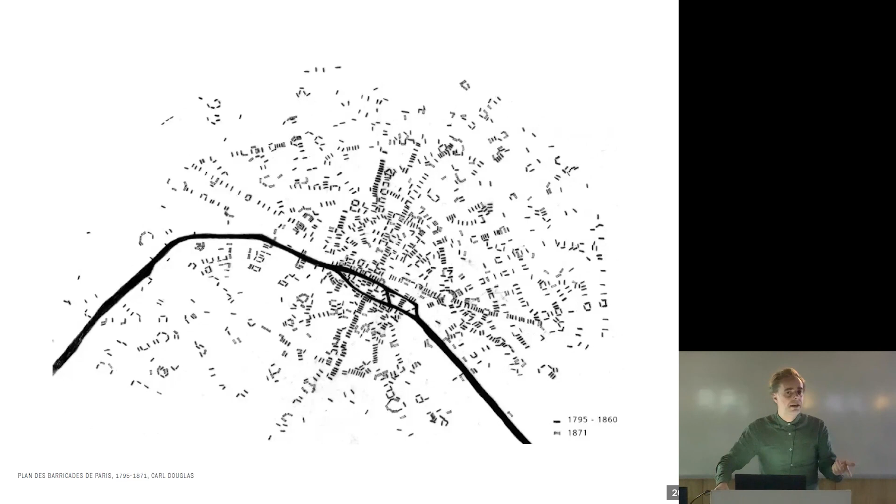This is a map of Paris, 19th century, and this figure of the barricade is actually quite important in Paris because mostly in the middle of the 19th century it was a period of intense manifestations and riots. This is the map that summarizes the places where all the barricades were situated. You can see the barricade as a very urban figure here.

There were so many barricades that Auguste Blanqui, another anarchist, derived some principles for construction, to build a good barricade, one that resists anything. So he published it in a book called Instruction for an Armed Uprising.

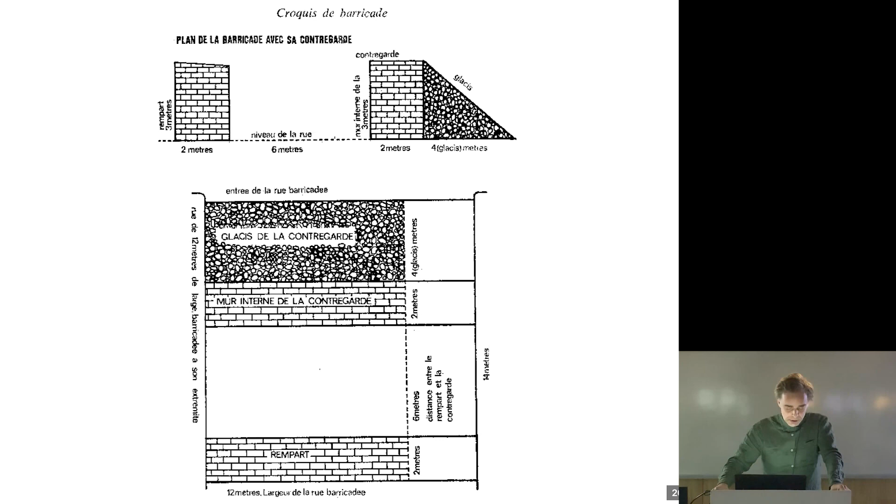But we thought maybe those figures have a number of characteristics that we may find in architecture. We may try to analyze this architecture in terms of what they allow and what they don't. So I've organized the conference around four characteristics that you may find in some architectures or not — characteristics that allow for freedom as we understand it: freedom as the capacity to raise the desire for occupation.

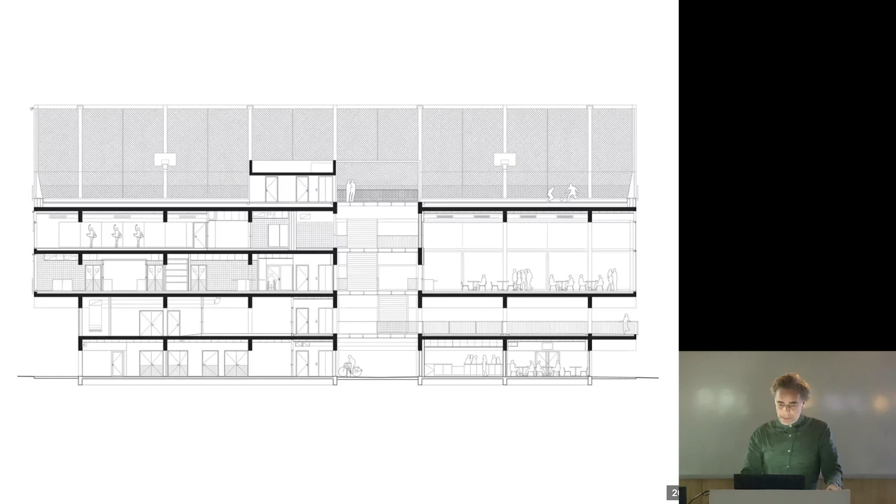So I'm starting with our Saclay building. It's on the outskirts of Paris, southwest. It's a university building. I won't tell you about the whole context, but I focused on the themes.

Within this building, there's one theme that we developed, which we translated as internal free space — spaces that are available but have no specific function. Basically, that's it. It's there, it's used for some particular reason, but it's not clearly defined what they're meant to be.

If you look at this building, you can see that on the first floor you have this mezzanine, you have a public path, you have a giant oversized stair, and you have the roof where you can play basketball. These are a whole series of spaces that are used all the time.

I mean, the roof was used before the building was finished. The young guys climbed on the building and managed to get to the roof because they saw that you could play basketball there. That's the first space that was occupied — probably because it was difficult to reach.

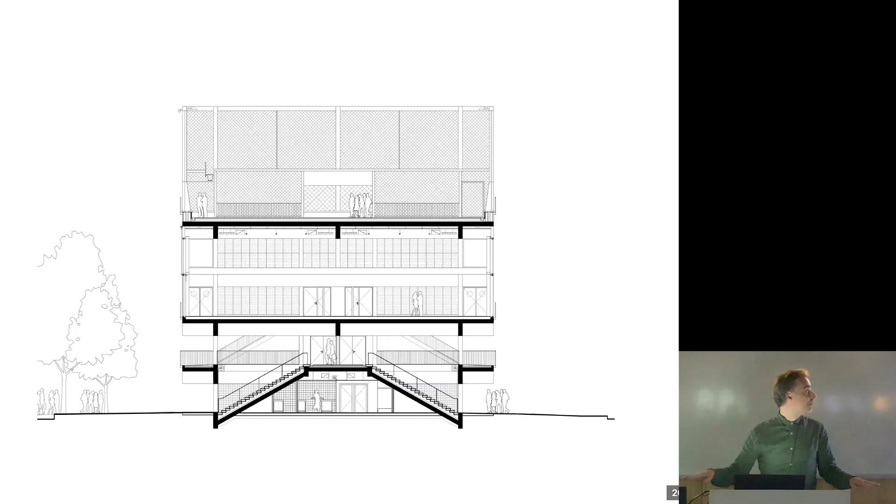And there's another figure, which is the stair. The stair is 5 meters wide. It's like a stair for a stadium. You can sit on it, and people can still walk through it — no problem, it's so big. And that stair comes from the ground and goes up to the roof.

With this particularity that it's inside the building, but it's an outdoor space. I mean, it's raining inside. It's full of moss now — it's almost all green. But it's like a Klein bottle — you don't know, it's like it's outside coming inside.

We did that because we thought it would be like a vertical street. You could cross the building from the ground to the top without actually entering internal spaces. So it means you can play basketball even though the building is closed. That was an idea that the building would run 24 hours a day.

So this is a place where you meet. You meet in the stairs as much as you discuss in the kitchen in a party. You're doing something because you're not supposed to do it, and that condition raises the desire to do something you're not supposed to.

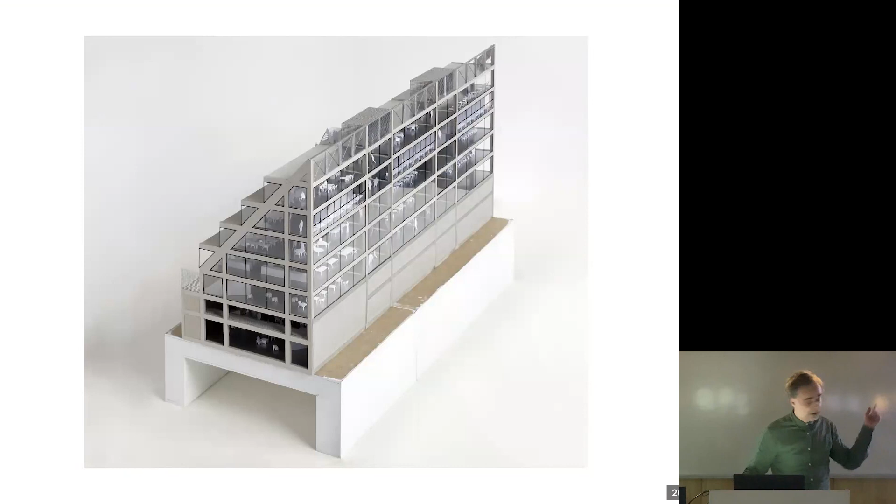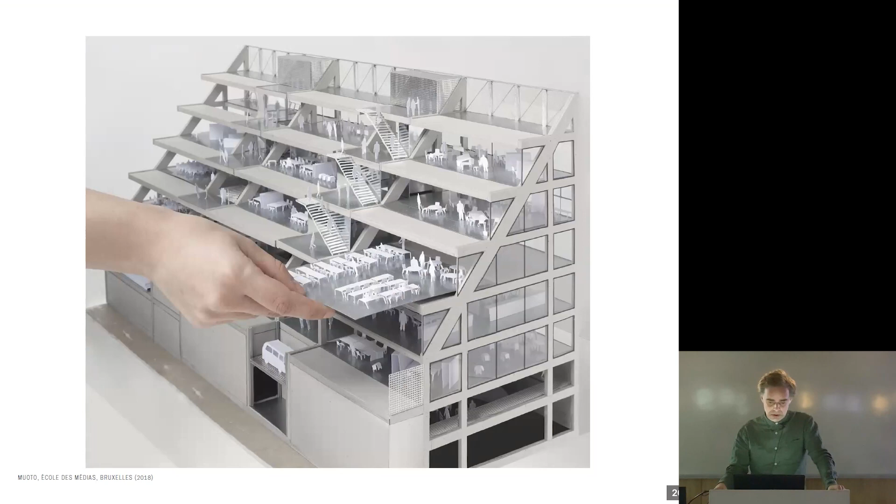So that's an example. This is a school for media we did for a competition in Brussels. And we had a special urban constraint that the building has to step back from. I didn't show you the context, but in front of this building there's a typical Brussels urban block with housing, and on the other side there's a park.

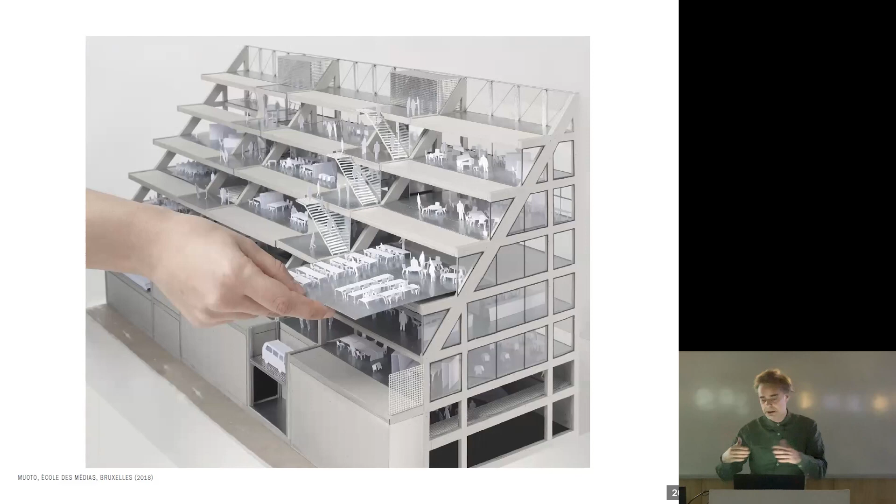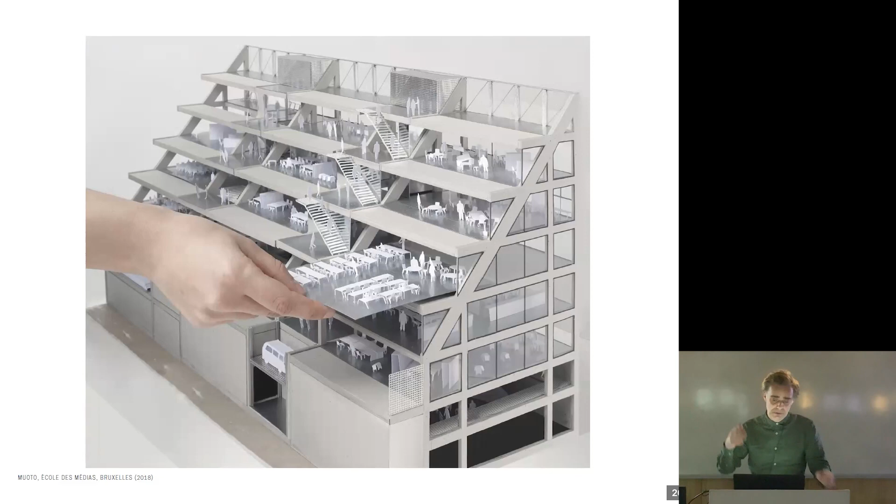So we had to step back, and we thought, why not use that constraint to shape the building and give it that very specific profile that's like a stair. It's almost like the structure of a stadium, because of course it's nice to have balconies, terraces on the south, for teachers and students to meet. Makes you want to climb the building also, and it did respond somehow to the program.

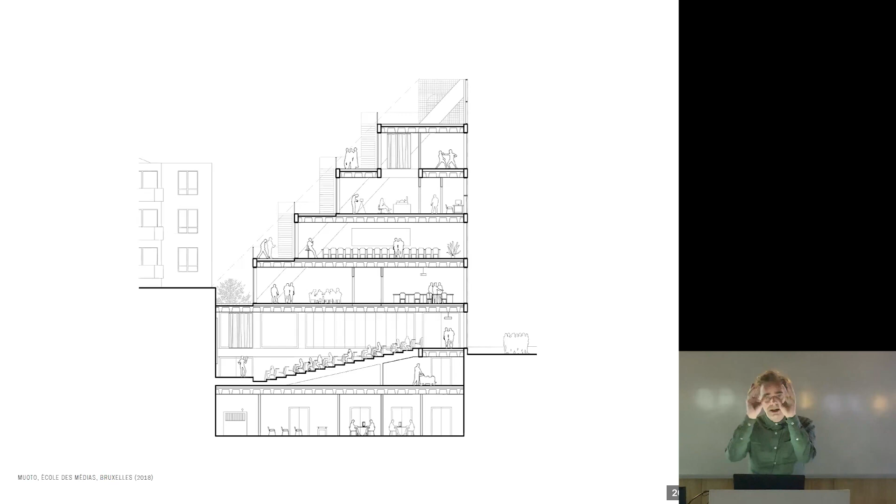Because in that school of media, you have large studios to record movies and TV shows that rehearse what students may be on TV one day. You have the auditorium as well. But also there are moments where the students, at the end of their studies, do their little movie, and you have very tiny cells at the top. They're tiny, and they spend like 2 or 3 months at the end just on their own making their movie.

So this shape, this profile, did allow us to have very large black spaces with no light - you don't want any light in a studio, not much, just a little bit for the auditorium. And you want to have a nice little cell if you spend months on your own at the top. So we thought the fact that every floor has a different quality of light, a different condition, allows you to do different things.

Because there are classrooms and offices, and all of those spaces require different depth. So if you would do a typical regular section with the same depth everywhere, you would just do the same - basically, that would be difficult. So we thought that this constraint, the fact that every floor is different, this is freedom.

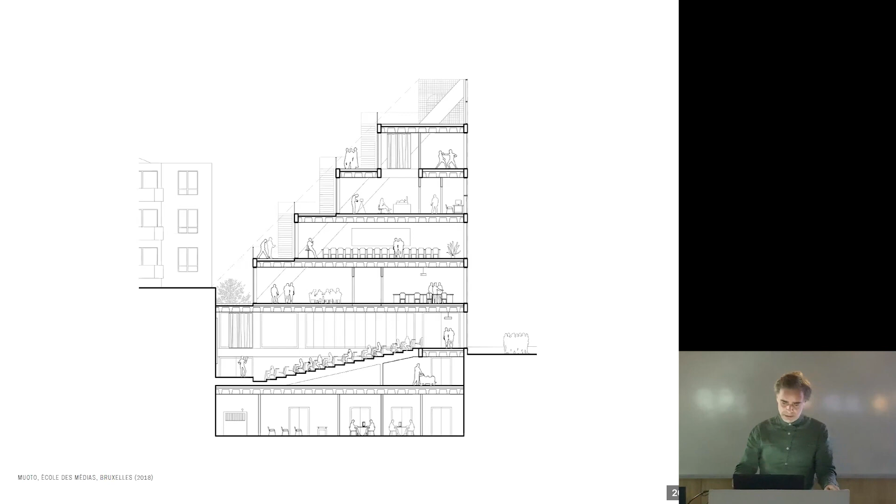This constraint allows you freedom. If you think that freedom is an open, flexible space with a long span, I would say that is not true. If you think of a typical office space, standard, perfectly flat, with all the appliances, plugs, perfect sound, you don't want to do anything there. So this is like an idea of freedom, but I think it's actually not.

So that's the building, different facade, and the basic structure of the building. If you want another example, a non-architectural one, of this relation between constraint and freedom...

This is a very known experiment from Matthew Barney called Drawing Restraint, where he attaches himself in order to draw on the walls and ceilings, which is a way of not drawing the way you would draw normally. It's pretty much architectural in a way, like he's jumping on a trampoline in order to draw on the ceiling. I think this is a good example.

The third figure is the figure of the scenario, thinking through scenarios. This is not very original, I would admit that, but it's still an exercise to imagine what a building could do, or how it could be occupied. You may not just think of one occupation, but several ones.

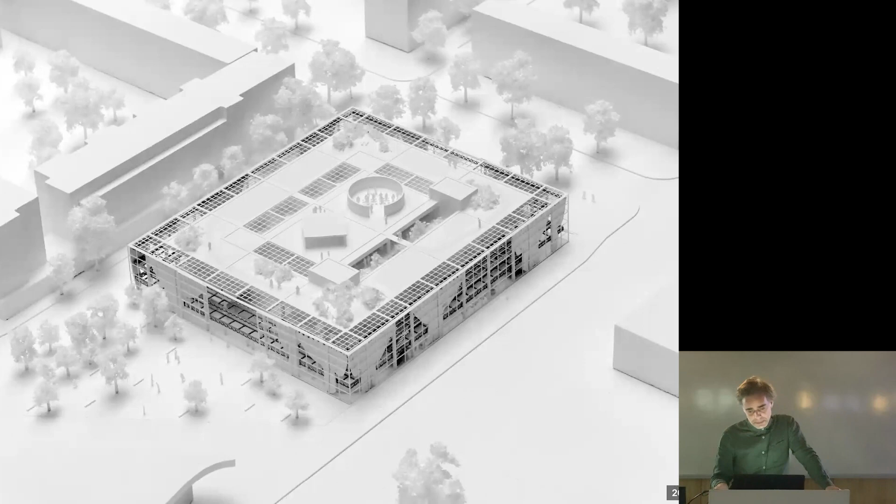So the example is a project competition we did for the Atelier Médicis, on the outskirts of Paris, a tough neighborhood. But the program is very interesting, really exciting. It's a place dedicated to street art, dance, occupation through the bodies. There will be dancers, singers, ateliers, and what we call the big black box, the main room where you rehearse and do spectacles.

So we designed it within a square as a way to define public space around it. The metro station is just in front of it, because the metro is coming soon. That's the reason the building is situated here.

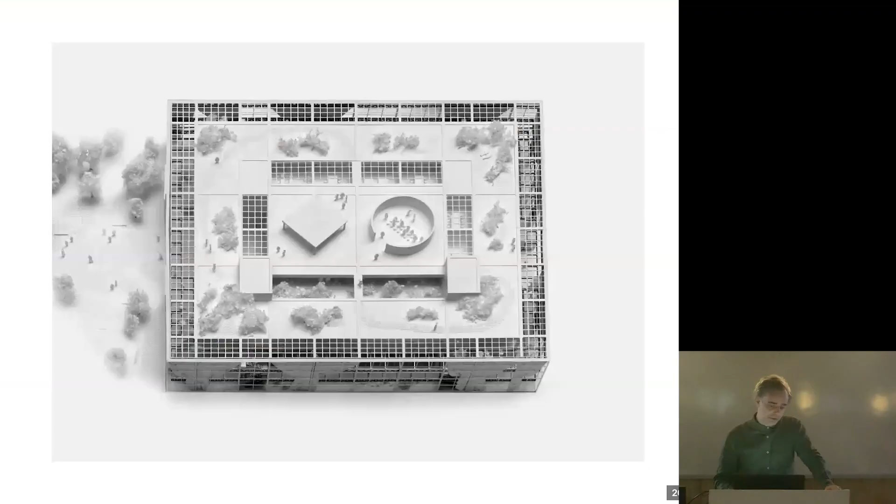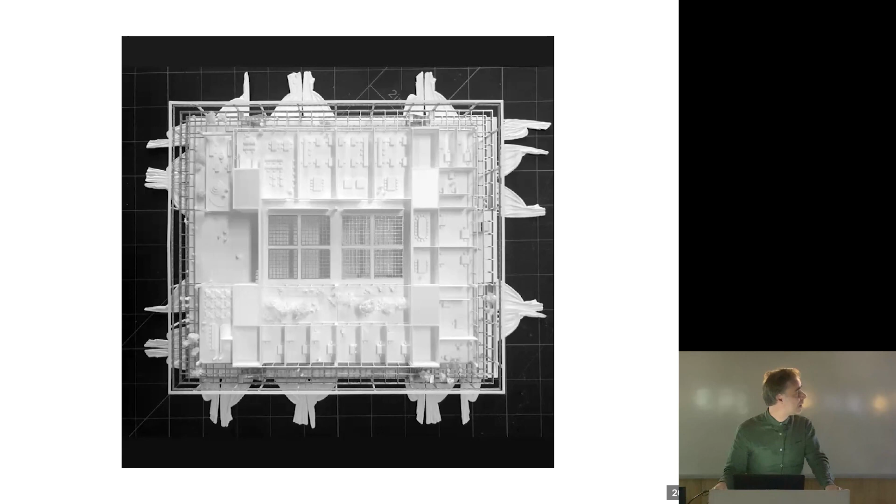It's a very flat building, and its specificity is that the black room is situated right in the middle, because it doesn't need natural light, and it's like an onion structure. Everything goes around it, and you have a first belt of studios, exhibition space, logistics, entrance, etc. There are many activities, and we thought that if we put the black room in the middle, you could also open it onto the different spaces around.

So we thought we wanted to keep it low tech, because flexible black boxes have a whole history in theaters, and very few of them actually work. Usually it's so complicated to change the configuration that it remains the same. It doesn't actually work. The one in Paris that works is in the House of Japan, but it's super sophisticated and mechanical, and we didn't have the budget for that.

So we thought we'd just put two sound walls, two mobile walls around. That helps with sound restriction, and you can just open them. You can open them on the left, towards the entrance, on the right, towards the logistics with the truck, or on both sides.

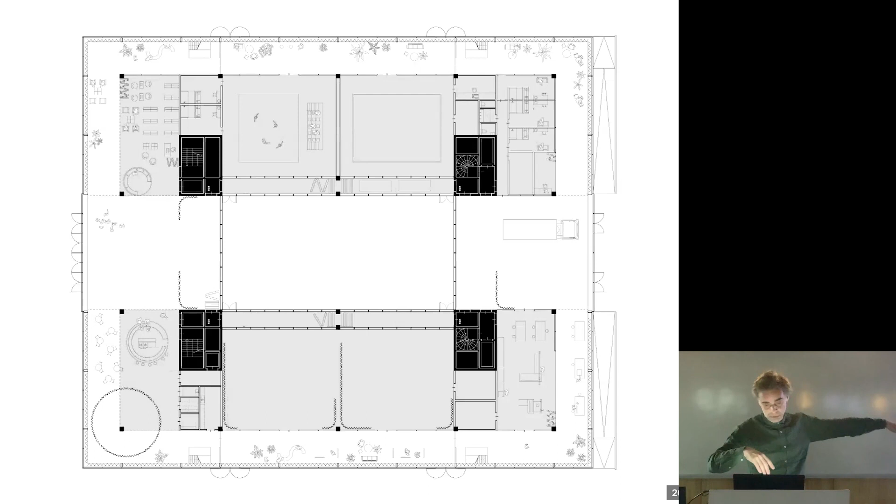On the bottom of the plan, you have the white cube, still close to the black box. That's the exhibition space, and at the top you have studios. Then all around you have the circulation.

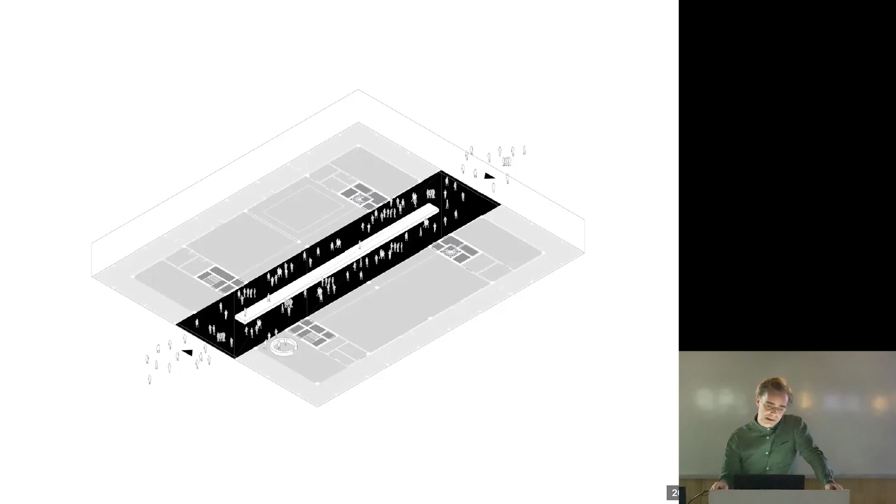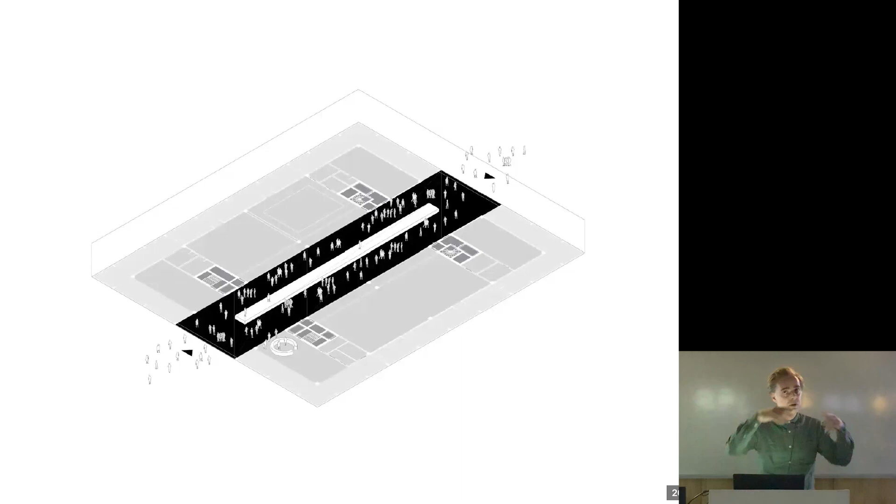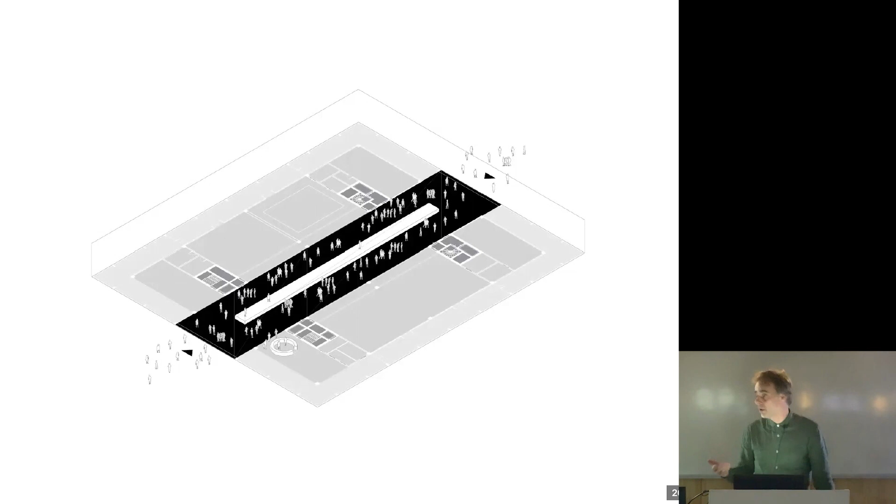We talked a little with dancers, in particular Boris Charmatz, who told us: look, nowadays what we're looking for are special places that are inspiring for new choreography. What we're looking for is not the typical wooden floor and all that. We want places that help us imagine a new way of dancing, and we can dance on concrete because we have sneakers. It's good. You don't need the kind of wood where you can only do normal dancing. So I think this idea meant to us that you could dance anywhere.

You can dance in the stairs, you can dance in the corridors, you can dance in the logistics with the trucks and everything. So here you can have a parade. Here you can have a little forum, discussions or boxing. They look like the guys are boxing in the middle. This is just a hall. The entrance hall is becoming the place, so it could have an auditorium that is open to the outside.

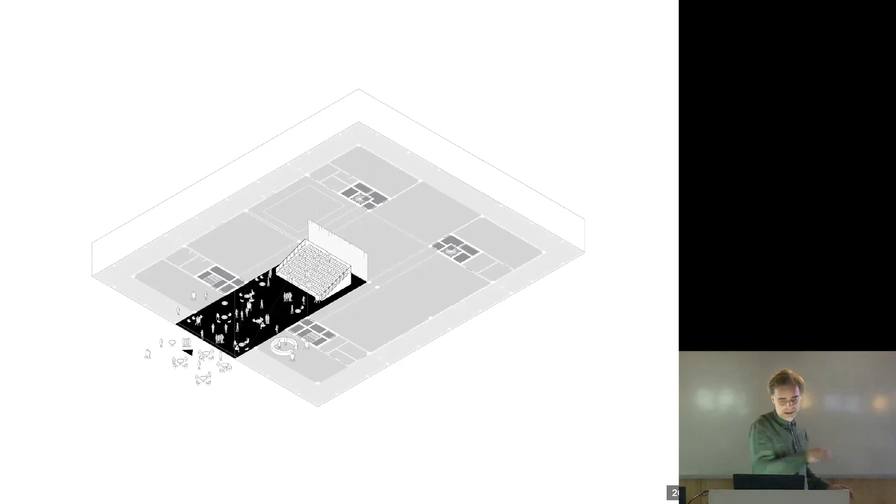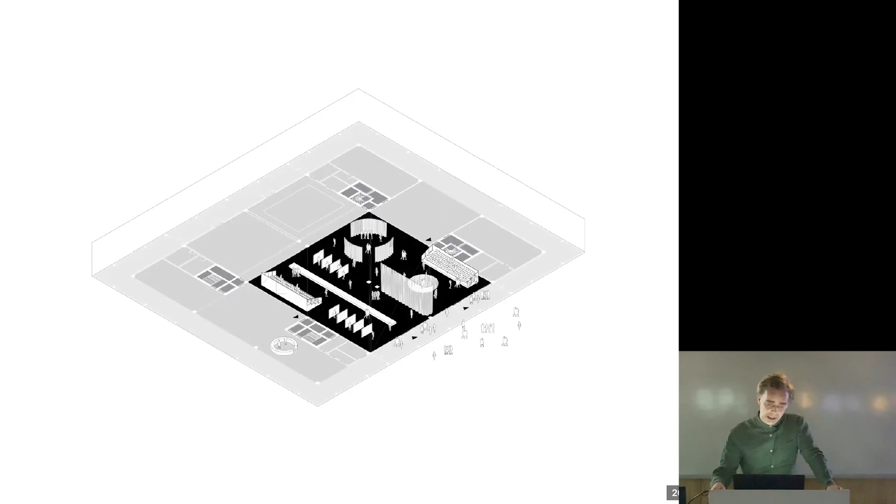Of course, you can separate the two parts of the room, but that was part of the program. And you can have this huge exhibition space that you don't have much around Paris, and it has this square proportion, and you could do quite different exhibitions. That's another - I don't know how many we had. We didn't put them all, but it's almost infinite, depending on what you can do.

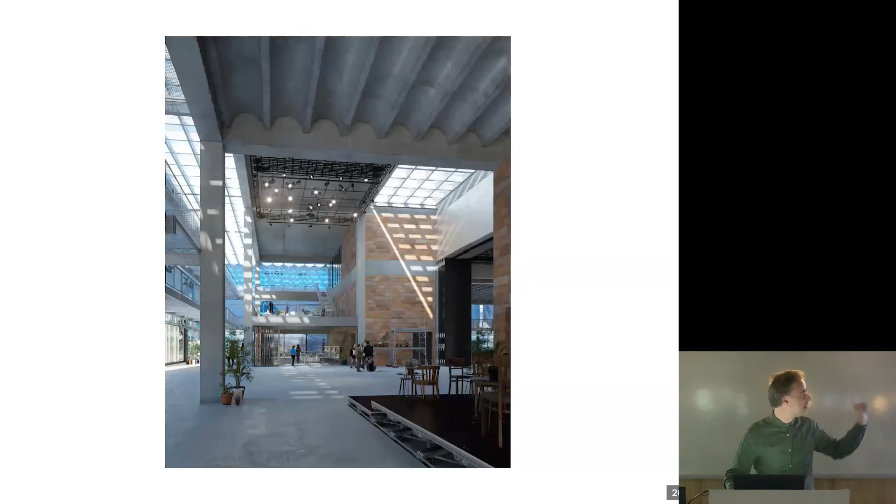So I don't remember how I finished this example. Oh yeah, the last part is the corridor. That's the space that goes around. Actually, all circulation is situated on the periphery of the buildings, where the different rooms can open to - where this is the exhibition space. And this space, it means that the facade became so thick, so wide, that you could inhabit somehow the facade itself, and you have basically no corridor, no black space within the buildings.

There's partly light coming from the ceiling, but this space around became also an unprogrammed space. It wasn't part of the... it's 5 meters wide. It's actually the size of our office, with exactly the kind of space we work in. Maybe that's why we liked it.

And this is a space - this is an unprogrammed space, so it sort of relates to the kind of space we imagined for the Saclay buildings, also in terms of climate conditions. It really helps the building get warmer during the winter, and it's ventilated, so it helps the building cool down during the summer.

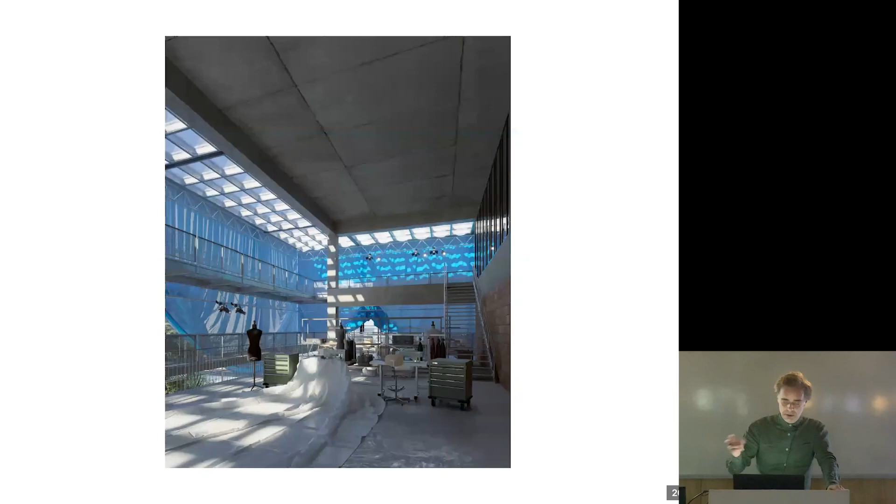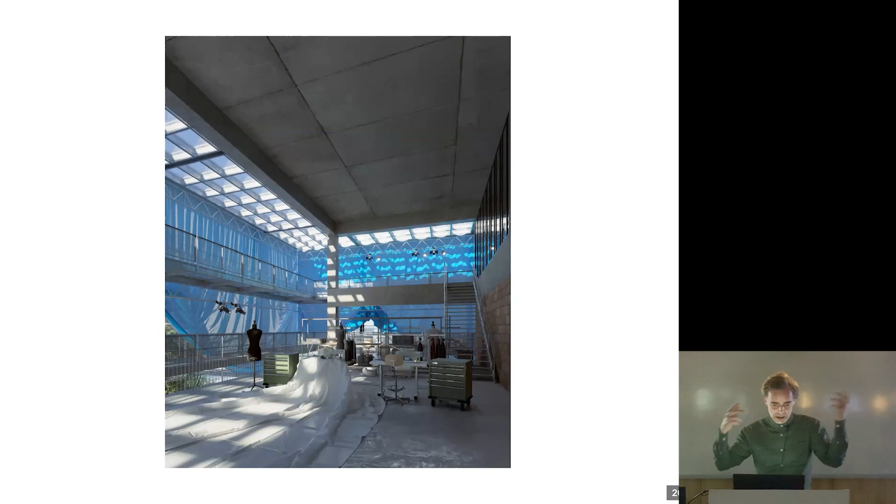That's the sewing studio that is situated on a mezzanine, and we imagined that you would have the backstage. This corridor would be like the backstage. So we installed a few lights, and we thought that dancers would have interesting spaces in order to perform or to improvise something.

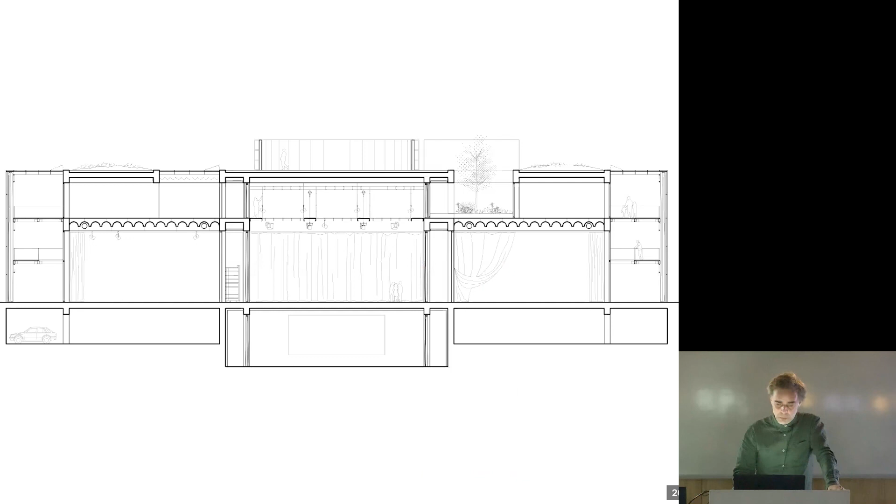And the last year we added those curtains because they gave a sense of a very theater feeling. That also helps for cooling, for thermal aspects and constraints of the building. It also helps hiding that space and keep a certain intimacy for everybody. You're in quite a difficult district, so you can close down the building as well. Very simple section - we introduced a few courtyards, and of course the roof is accessible as another place where you can perform as well.

So the tests - so this is where the title of this conference is coming from. This is a book by Maggie Nelson. And this will take us to a last figure that we'll develop a little more, which is the grid.

The grid for us is really a feature or figure of freedom. It says that freedom somehow is not a question of letting go, of just expressing yourself, but it's also a question of measure, of the size of things, and how you govern, how you organize a space. Because a building always implies a certain kind of hierarchy. You always have to decide: do you put people on top of each other or next to each other, for instance? There's different organization - who's on the top, who's downstairs, who's on the left, who's on the right, which condition do you give to everybody?

So buildings always imply a kind of organization. So which organization do you choose? That's, in a way, a very political aspect of architecture. It means architecture forces you to decide how people will organize themselves. It's a way to say that any building is like a small society - we live together. So how do we live together? That's a big question.

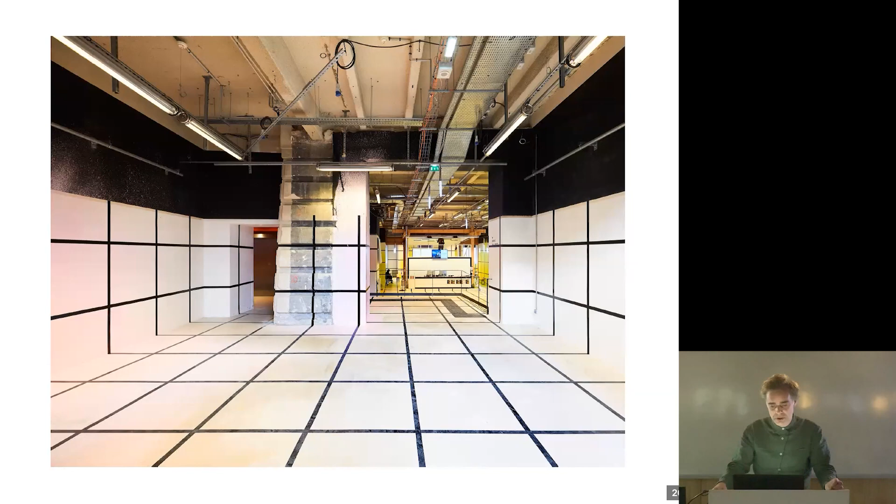We did a little installation with Arnaud Brandelouber last year, just after the lockdown, at the Cité de l'Architecture — this is our national place for architecture. It had been closed down for almost two years, and when they were reopening, they suggested we do something together. So we played with the Republican aspects of the building, because this is our national place.

Our first idea was to go downstairs into the cave, into the archives. We thought there was so much material and stuff for exhibition, and thought, let's exhibit the exhibition infrastructure — we won't show our projects, there are books for that. We had our 2Gs, we made a special issue mixing our two magazines together. And we said no, let's exhibit the exhibition stuff itself.

This was going to be like a spring cleaning, as we were reopening — we'd take off the dust and exhibit the hidden infrastructure of the building. So we thought, okay, let's organize everything. We'd make a grid, one by one, put a small number, and clear things out. The technical team was pretty happy — they said, oh yeah, we've got too much stuff, we'll do that. So we started taking tape, like stupid black tape.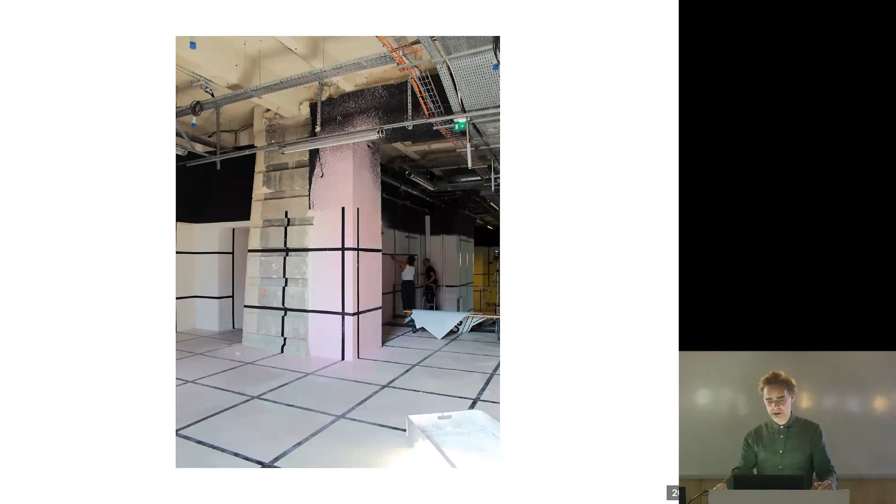We started drawing this grid from the floor, and we had kilometers of tape, like 4 kilometers. Then we went to the walls, and then we had exceptions — a strange column here, pipes, we went behind the pipes, but the structure is also on top of the structure. We started dealing with plenty of exceptions, even the windows.

We thought, should we do the windows? And said, yeah, let's do the windows, why not? And the stairs — the stairs already had a white strip for handicapped people to make it more visible, so there was already some tape there. Radiators, yes, let's do it. The lift — no, won't take the lift. Angles, yeah, great, why not? And toilets, I don't know.

Anyway, every day half of the office was there taping everything. It took us like a week. They were calling me, what do you do? Do we tape the toilets? I said no. We started taping it — all right, go for it. And then I think we were sort of dealing with our own Republican system, this overall grid that is meant to cover everything, like the country, the nation is one.

We had to face that there were many different places and things, and we had to make a decision whether they would be included into the grid or not. So I think we were just asking ourselves the great questions about how could we arrange our ideal Republican, equal Republican system with the cultural differences.

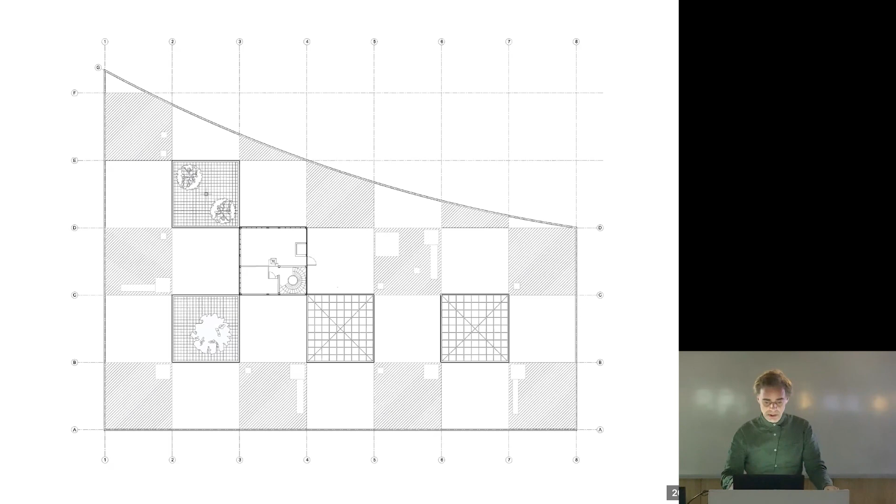The last building we did is in Montpellier, south of France. And here the grid is not 1 meter by 1 meter, it's 12 meters by 12 meters. So suddenly the size of it allows to do very different things. So the initial program of this building is an office building, basically.

The interesting thing is it was dedicated to high-tech companies, young companies that grow a lot, that reduce, that have a very uneven future, and they have to change. We reached this idea of flexibility, but we thought if we do a normal office building, they won't come. It's situated next to the high-speed train station, far away from the city center. So they wouldn't come. They are creative people. So what kind of space can we do so there would be good reasons to go that far?

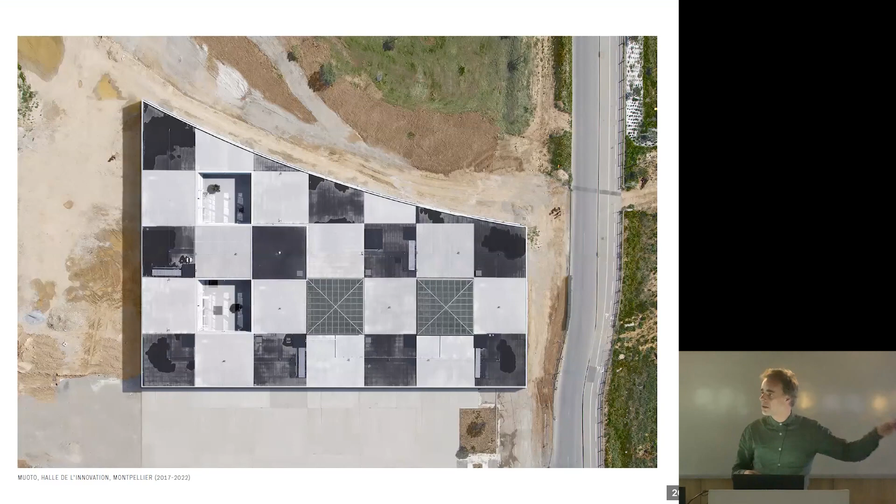So we thought, rather than doing a big open space, we'll do small open spaces. We thought we have to divide things so it remains somehow flexible, but at the same time give you very different conditions to work. Good reasons to see someone because its office is in the corner, or on top, or downstairs, and so on. So the grid here seems to be a very equal figure, a figure that makes everything quite similar, but in fact it makes every space slightly different. That is, repetition is not equal to sameness.

Repetition can introduce variation as well. Difference and repetition—I won't make too much of it because I'm not a philosopher, but you get the idea by repeating. If you think of, for instance, Philip Glass's music, you can see how much repetition can create variations and differences. So that's about the same idea here. By repeating this grid, you can reach different conditions, and we pretty much work on that possibility.

For instance, this is our internal street. You see that we often use that metaphor of the street, of the public space within buildings. Some squares are occupied by little open space, like classical, normal office space. Some are atriums, and some are patios. And that's basically the scheme that we started from.

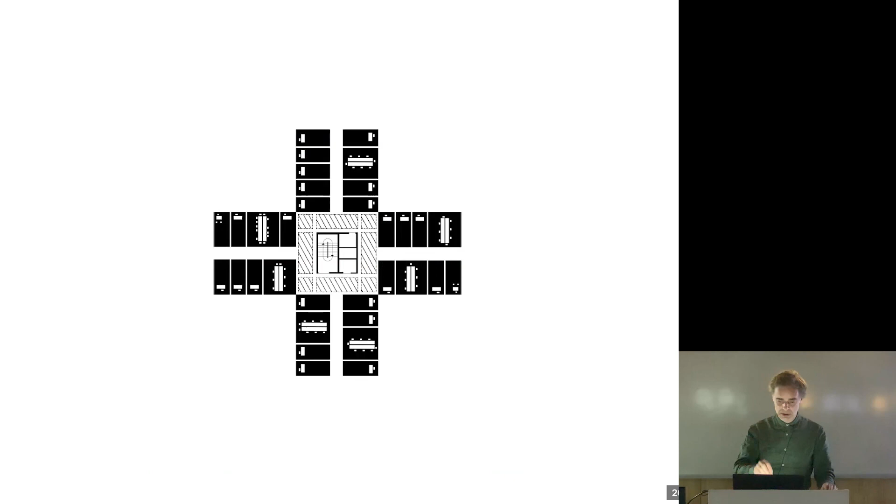That scheme, we thought, okay, you have a core with services and stuff. You have the possibility to reach 4 different office spaces, and then you multiply. It's an infinite grid, and we introduce one street in order to go through the building.

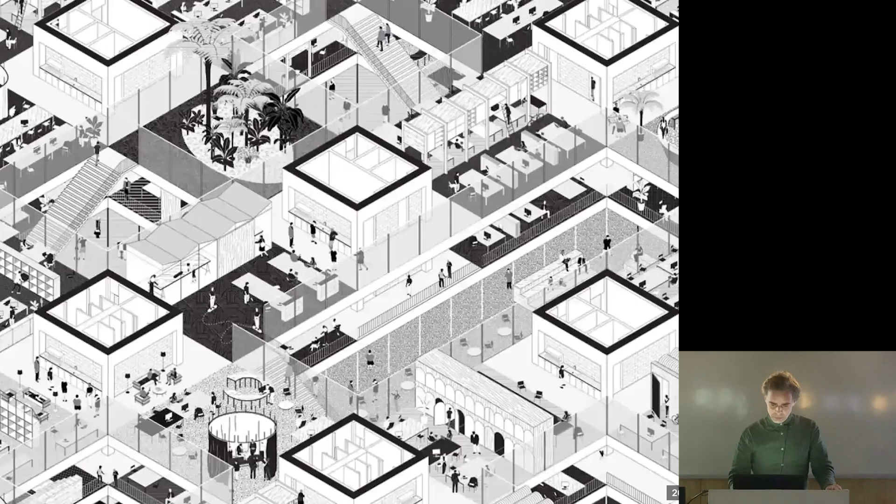We talked to the mayor at the time. He said, 'But that's the Roman city, basically. Montpellier is a Roman city.' He said, 'Yeah, it's actually the Cardo, the two axes, the Cardo and the Decumanus—the east-west and north-south axes.' That actually defined the very beginning of the city.

So since this building, like the Saclay building, was the first to come on the site, basically we had a very undefined context. We were sort of marking the beginning of the context. That's why this building maybe relates pretty much to the Saclay building. Well, the grid sort of helps you define the various conditions—like the beginning of France, when the nation starts, how do you start with a nation—and the grid came as a starting point, as a way to organize yourself before you know exactly the content of every bit.

So that's the model, and you can see this alternative for the office building. Office buildings usually have generic office space, 18, 19 meters wide, with a central core—like a third of the building is actually in the dark. And here the idea was that most spaces were lit with natural light.

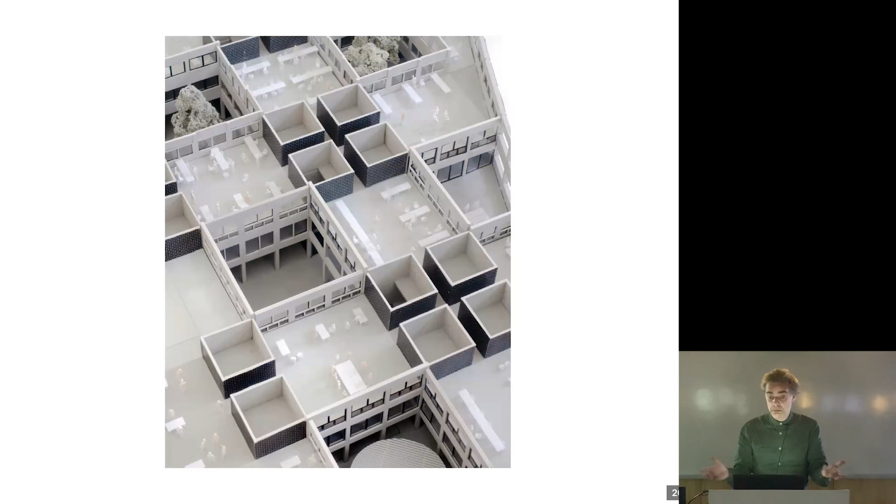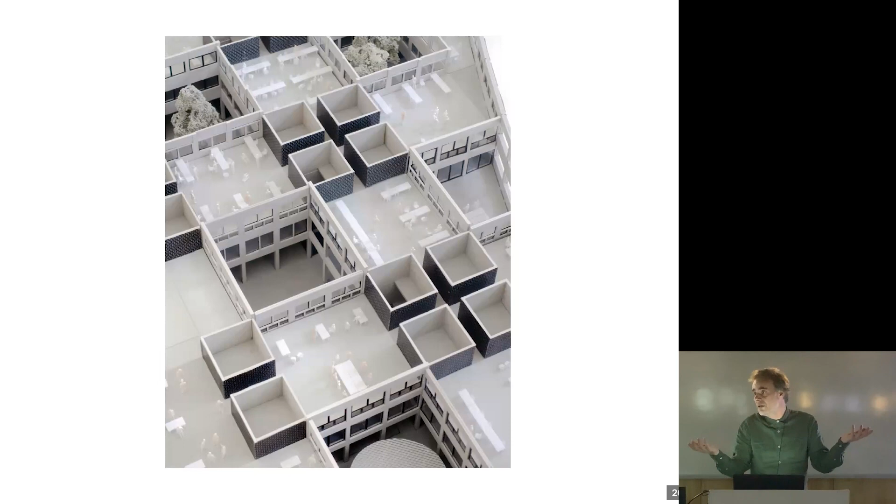And if you think it's 12 meters deep, then you could do housing—it doesn't have to be offices. So it's a different way of working, giving real occasions to go to a terrace or a patio. I mean, to have real differences within the building.

That's an office space, for instance, on the first floor. We can talk about architecture a little bit. The big question was how to make it while being effective with the cost of the building.

This is cheaper, almost the lowest normal cost for an office building. We had to imagine something in between public infrastructure, public equipment, and the office building, given that they don't cost the same. So the idea was to create that crossover, that typology that is in between.

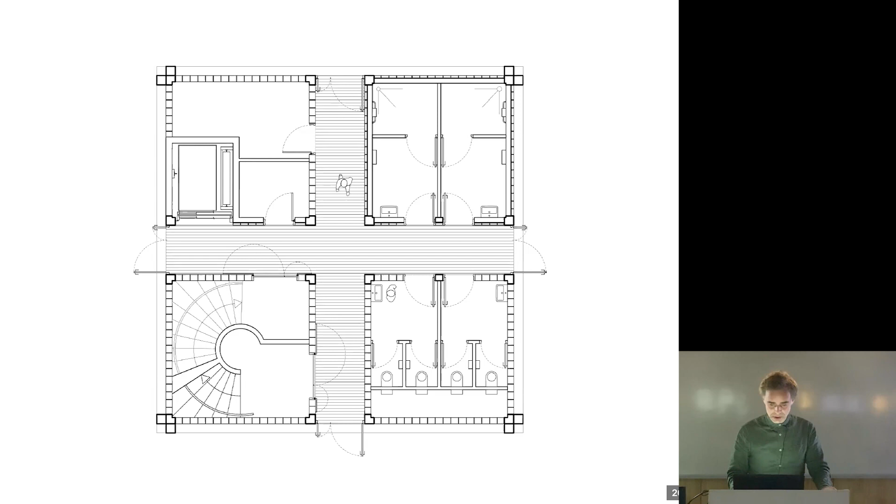That's an example of the same square. Why 12 meters, actually a little less than 12 meters, is because there you can fit exactly the technical core with the circulation, the toilets and everything, but you can still fit an office space. It has natural light from everywhere.

This is a meeting room with projection, 360 degree projection. This is the atrium. And this is the patio that is outside.

You introduce various terraces, outdoor terraces on the two ends of the street. And this is one atrium with the meeting room in the middle. So the idea is that from anywhere within the building you can see through.

Actually, the building is absolutely transparent. It's not so much anymore because they put partitions a bit everywhere. But the rule was that everywhere you have that transparency, you make a main room. You have an open space, and you try to fit all the small offices where you don't have these transparencies, so you keep that view through the building, even though it's very deep.

That's the public ground floor where we've put all the public activities, like the cafeteria. There's a little forum, the park for the bikes, and the entrance. Here we work with these concrete blocks that help for the sound insulation and sound absorption.

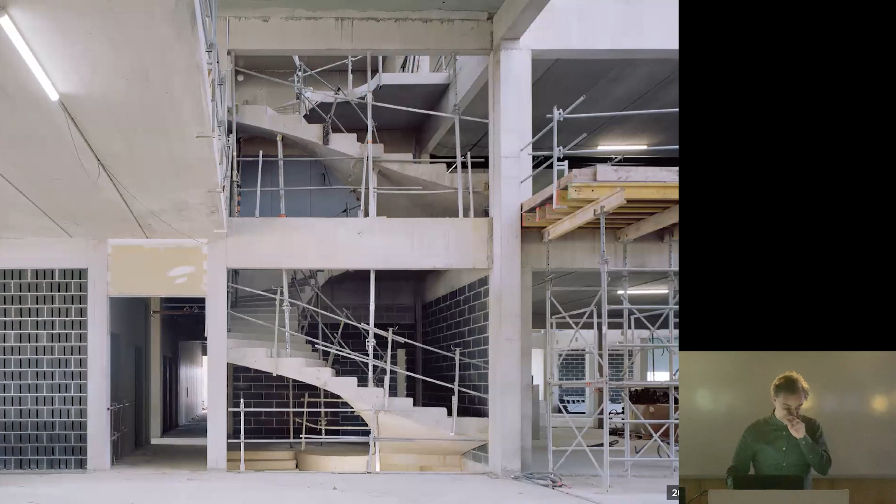That helped pretty much. These are the stairs, and the conceptual model that sort of came at the beginning but became more true in the end.

You have entrances all around the building. That means that every part of the building can work independently from the others. So it's the idea, just as it is in the Saclay building. The idea is that instead of having one main entrance, you have a series of entrances.

Because collective freedom should not oppose individual freedom. So how do you deal with that? How do you do it if you let individual expression exist? How do you do that?

Well, in the Saclay building, you don't have an entrance hall. There's no entrance hall, actually. Once you get rid of the entrance hall in your program, everything becomes different. You can organize yourself in very different ways. That means if you take the stair in Saclay, you can go to one activity or another.

They're all locked, you can lock them up. But you're not restricted to the activity of the other. So that's kind of a political aspect also of architecture.

But it's pretty much the same here, just on a very horizontal level. You have entrances everywhere, and in theory you would never go through the entrance hall. Okay, that's not exactly how it works now, but it's still possible to do it.

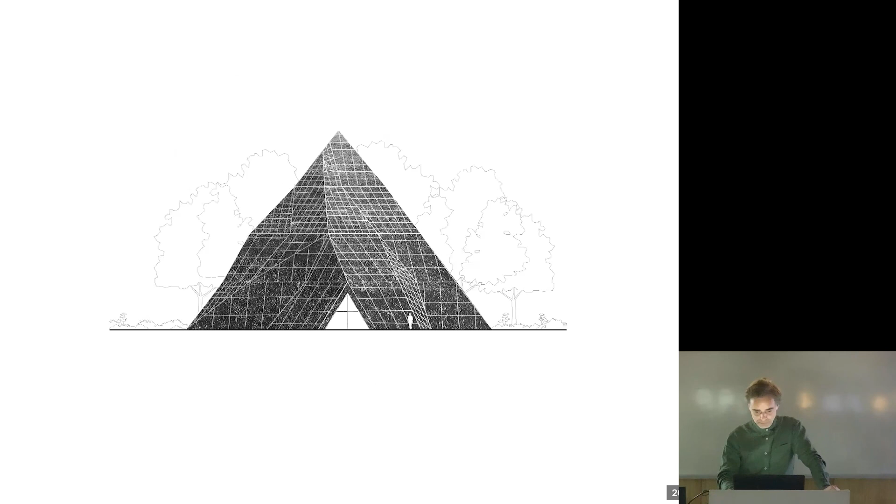The latest project will be the Biennale project with this funny sentence from Emma Goldman who relates dance and revolution. She says, if you cannot party in your revolution, I don't want it. It's just that the revolution shouldn't be about killing each other. It should be about celebration, basically.

So we did this pavilion in Venice. I'm not sure - this part of my presentation I haven't prepared, so I'm not sure where to start from. The one important theme was about occupation. It's okay, it's part of the theme.

Here we started from the idea of the feast or the party. In French we say fête - it has a really open meaning. A party is a bit restrictive to this kind of event, but we were more thinking about the preparation of an event, whatever event, how you prepare yourself in order to accept a whole bunch of people and prepare the capacity of a place to be occupied.

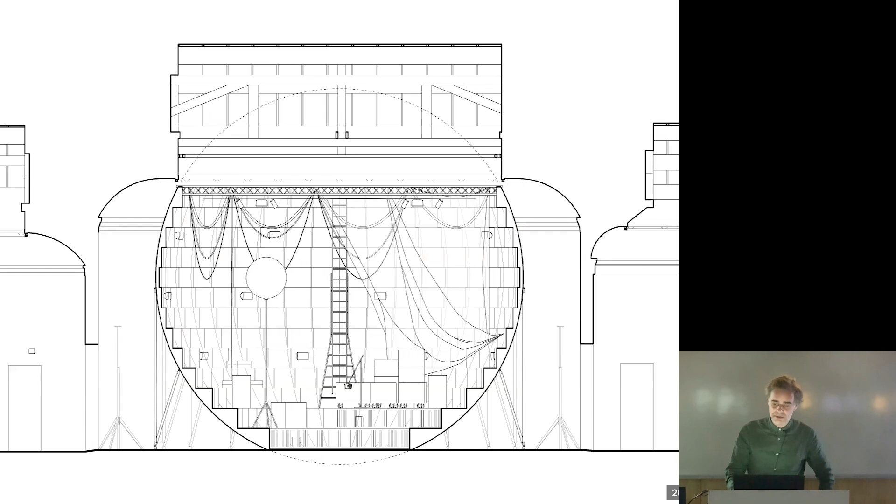So this idea was that of this installation that it would call for not exactly a future, but some elsewhere. How can you connect? How can you imagine something, a society that is very different? So that's the section. It will place with the French pavilion, a neoclassical pavilion, not really easy to occupy, and we imagine this boule-like shape, referring mostly to the whole imaginary of the spheres in architecture.

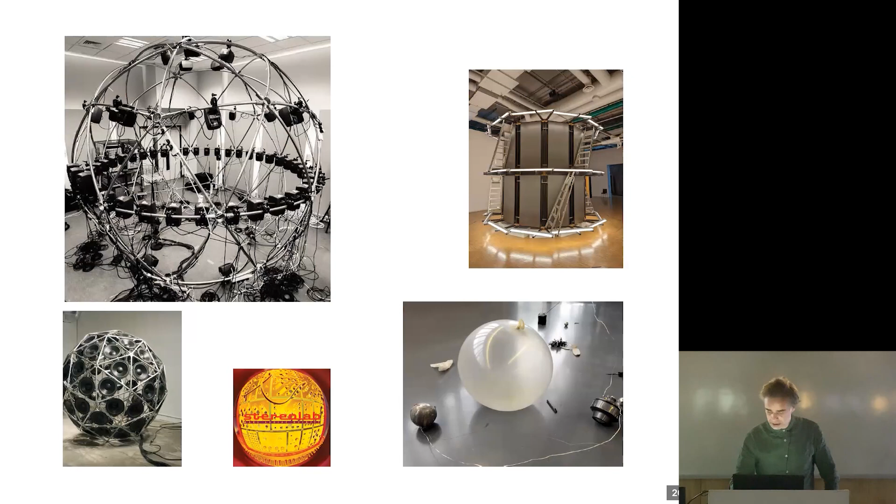Our first job, went too fast. I don't know, that's just our method. We really work with the scenographic methodology, doing the storyboards of everything that was round, more or less.

And we thought that the object itself should come as the discourse itself, meaning we wrote very little about it. We wrote for ourselves, but we didn't publish it. We said this pavilion does not sustain any discourse somehow. It's not a photocopy of a prevailing discourse. The object is a discourse. You can interpret it, and therefore you can occupy it the way you want.

So one week every month, there's a ball. There's a different event that is enacted by either dancers or researchers, by students, professors. And every month it's a different thing, a different event. And basically the program of the building, or the identity, the purpose of the building, actually builds itself month after month. So it's actually the repetition that creates the uniqueness of the building.

Deleuze on difference and repetition, he says, look, think of a festival: the more it repeats itself with a different programming, different artist, the more it becomes itself. Its identity is ahead. It's not the beginning, it's not the origin. It's the origin that builds itself with time.

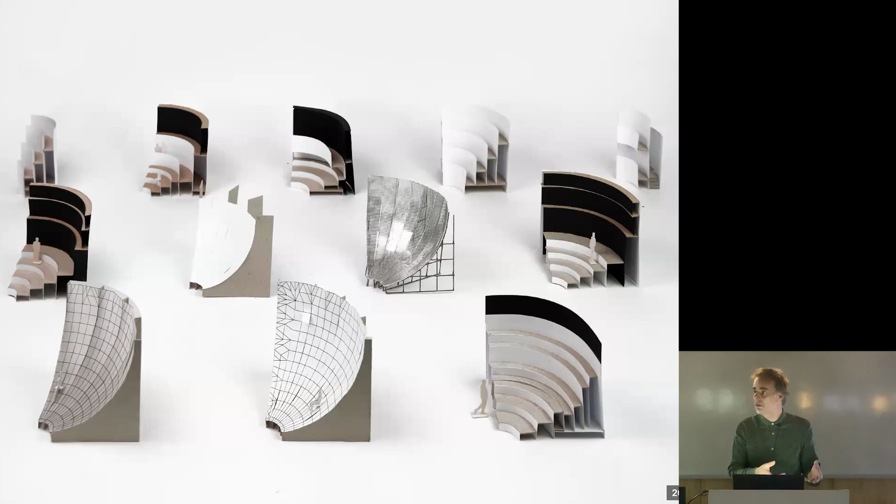And if we would be Peter Sloterdijk, we would say, no, it's about to take off. It's like it's a spaceship. No, it's going away, and we need to take distance, looking at our planet to understand it and respect it. So these are, for instance, two very different views on ecologies.

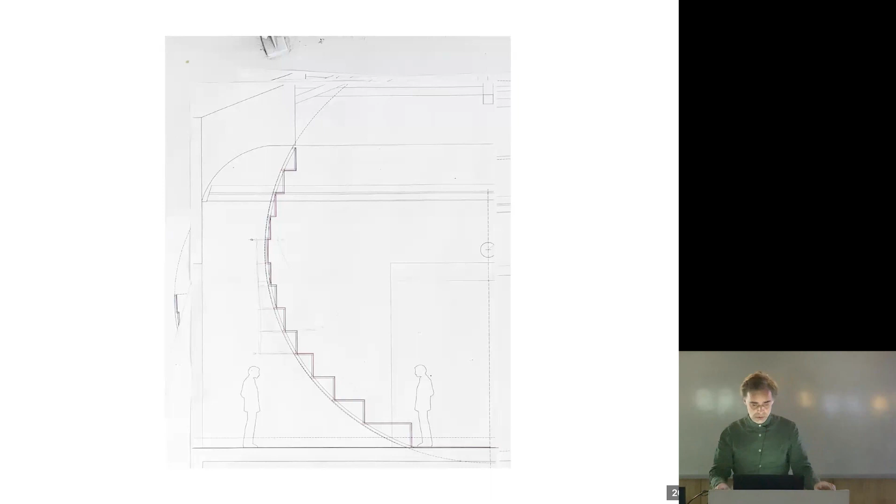We thought this was an object that should raise actually questions rather than give answers, because as we know in architecture, we are given many answers. At the moment, we exactly know everything we have to do, so it's a very good way not to think at all. So we thought this object should help think rather than tell us what to do. And I think most pavilions in the Biennale are exactly telling us what to do and what to think.

And these are a series of objects that actually inhabit the theater. We thought it would be inhabited by funny objects, and like in a picnic, we thought, if it's landed, you open the door of the caravan, of the trailer, and you spread all the devices, the tables, and everything. So we started designing a whole series of objects.

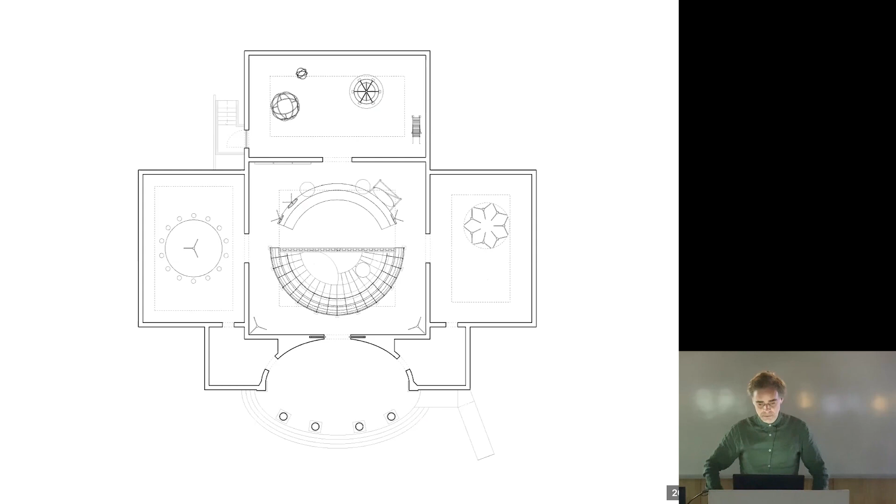So that's the plan. You see that the theater is really at the center of the building, and it's filled with little objects that we put in the different peripheral rooms. So that's how we enter. You can see the semi-sphere at the entrance.

You get wires because there's sound everywhere. It's a sound that is semi-musical, semi-spoken. That's the thing. We had a fairly big artistic theme, so we asked the composers to say, look, we need to feel that we hear voices coming from far away, playing with the idea of science fiction. That's the sphere being constructed.

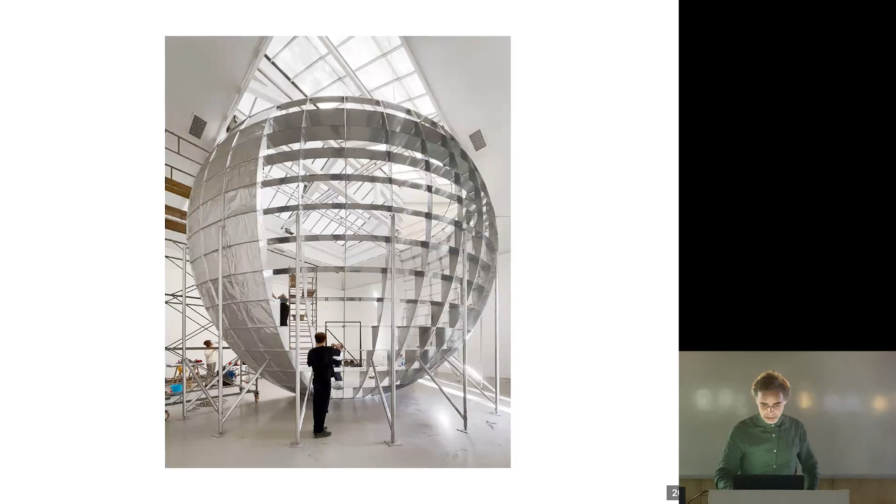And the idea is that the whole theater is actually built out of steel, because we thought this is its first life, but we'll be able to bring it somewhere else. You can totally mount it and unmount it, so it will be displaced, it will travel, it will go somewhere else.

So we were, of course, criticized for using steel, but we thought... because steel is bad, and we said, but for how long? I mean, it costs a lot of energy, and we thought, for how long? Because if...

I'm sorry, I didn't write it, so I'm making a small digression. These are things I was telling some journalists, saying this is not ecological, because there's a lot of energy in all this steel, but that's for how long?

Say, look, if you take a car, how do you measure the energy that the car dispenses? How much does it cost? So you say it's 6 liters for 100 kilometers. It's how much you need. And in architecture, it's 6 liters, which is very absurd, no? Because you can measure the amount of energy but you don't know for how long.

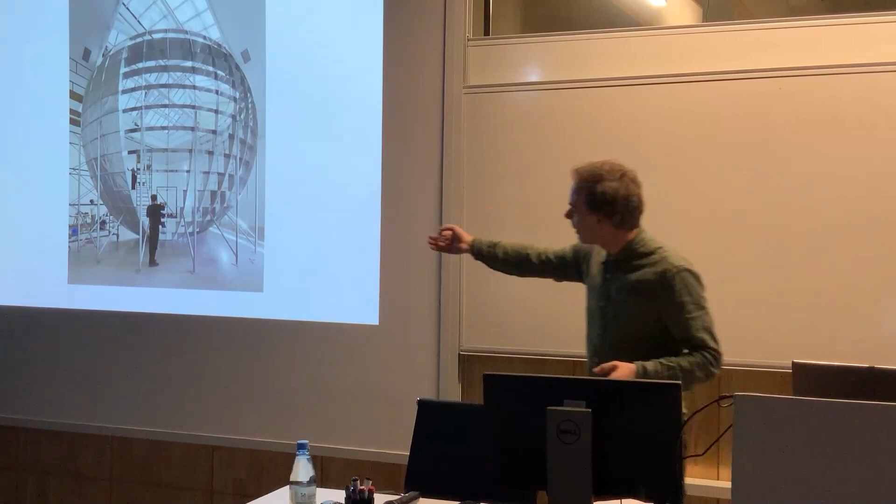You sort of exhibit the whole process, and that's probably a theme that goes through the different projects - you see the column and the beam, you see the screws underneath, you see the feet. The fact that you have some legs, for instance, here, says that it's going to fall down. So there are things that can help construct architecture, and instead of reinforcing it, sort of raise its fragility somehow. So I think that'd be the kind of transparency I would see in the project.

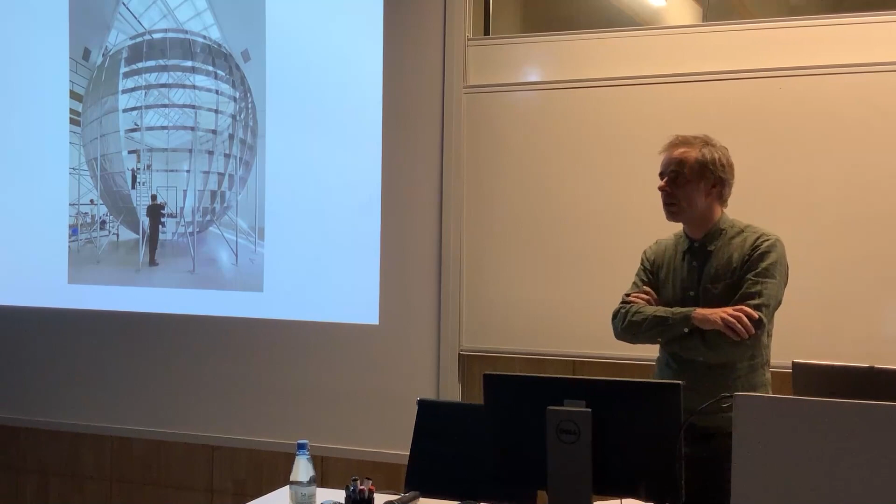Seeing through is one way of making. I think in the Ciclo building, since it came at a moment where this kind of architecture was not so fashionable, we said, well, instead of doing a sign, we'll say the activity will be the facade itself. If you can see that there are people in, you will want to join them, no?

Transparency of the facade will act as a sign, because it shows what's going on, and that's good reason to imagine a building has only bones and not much flesh. Because the flesh, the sign, will be the activity itself, and it works at night because you see what's going on within the building. For instance, we worked on the ceilings pretty much because we could see that from below. You would see the design of the building somehow.

Transparency is always about what you see. The transparency itself is not so interesting. And I guess this...

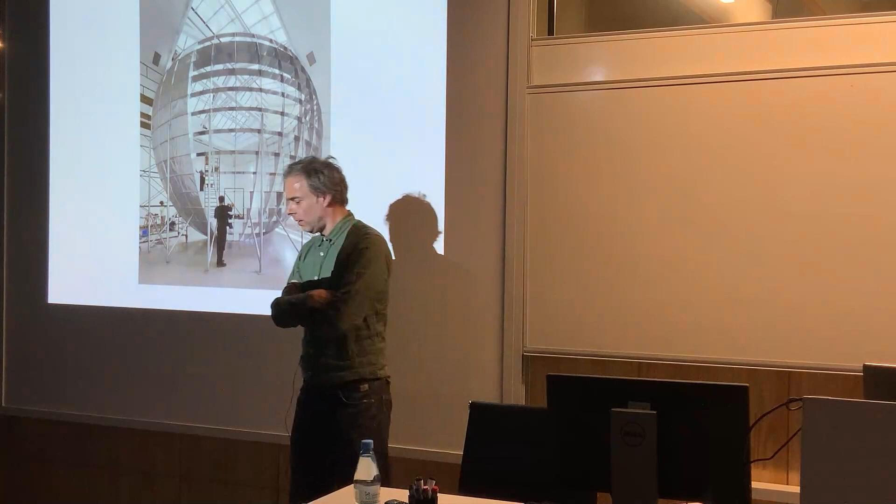Yeah, I think any new thing is a reaction against the previous. There's a strong thing like this in France, in schools. I think there's a lack of making. I guess students, they want to touch architecture in a different way.

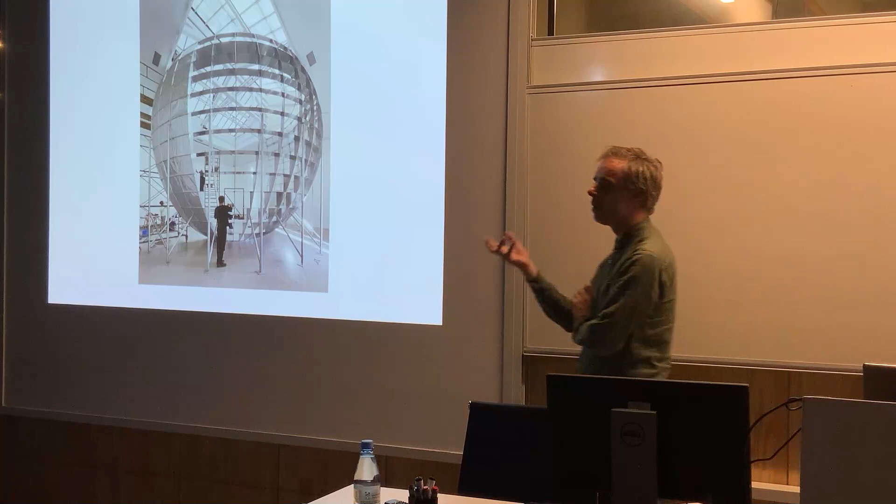I think we've reached a capacity to represent things now. You see with artificial intelligence, we're able to create things that are more real than reality. So we probably reached a level of realistic representation that pushes the students to go into another level. And this is making, the whole idea of making that is not so new, but pretty new in architecture, the makers and the whole generation of makers is coming into our field as well.

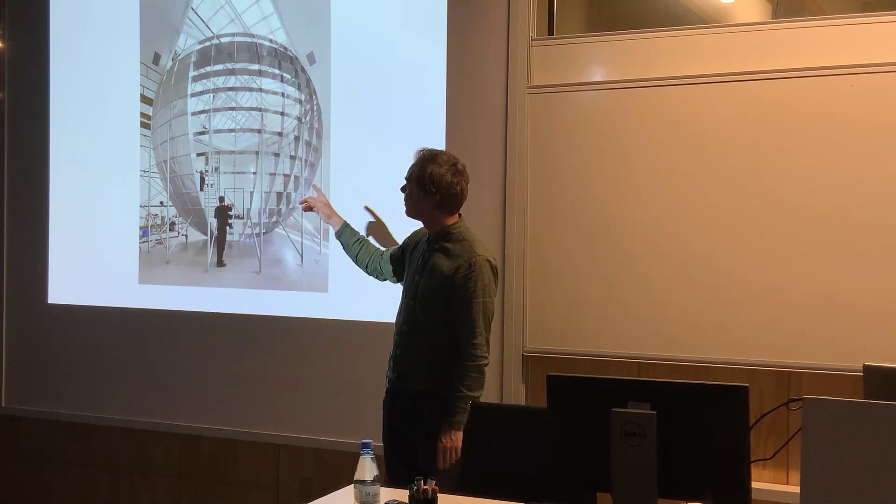It's not exactly one-to-one. I think there's still an ambiguity about the size of things, like the fact that this is in between representation and actual things. You don't know. I like the fact that this sphere is not clear, it's a small big object, or big small object. I think that moment where you don't know whether it's scenography, structure, or a model, or something that should be bigger, or a big object. I think this ambiguity in the scale of things is also part of the exercise of using real stuff.

But on a different context. I think it's also about experiencing the reality of an object and its meaning, whether you assemble like this or not. So it's not exactly the one-to-one thing.

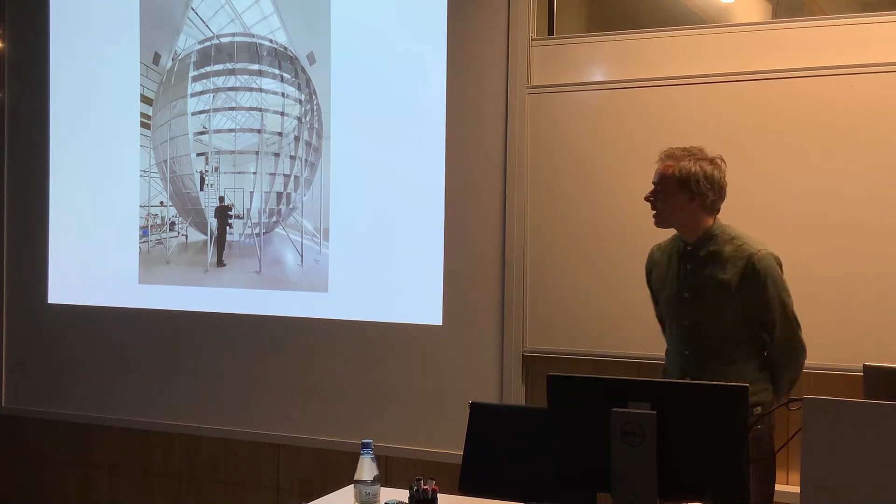It's about you making the stuff, and we teachers, instead of giving instruction, having our hands on the objects themselves. So now it's a very different way of communicating, actually. Which is less about corrections, but more about reflection of what next step to do, what are we going to do for next week, because you don't know what the object will be in the end.

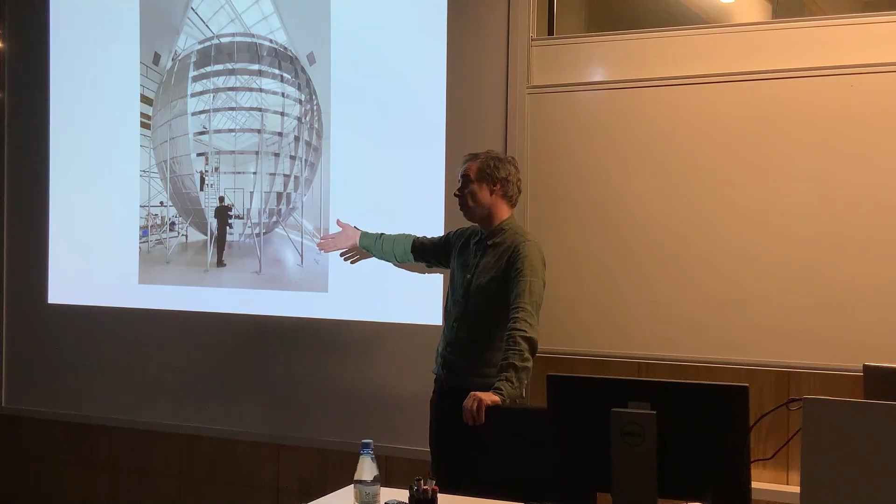The brief is pretty clear. It's less we can say. It's also a different way of teaching.

I don't know if there are any other questions.

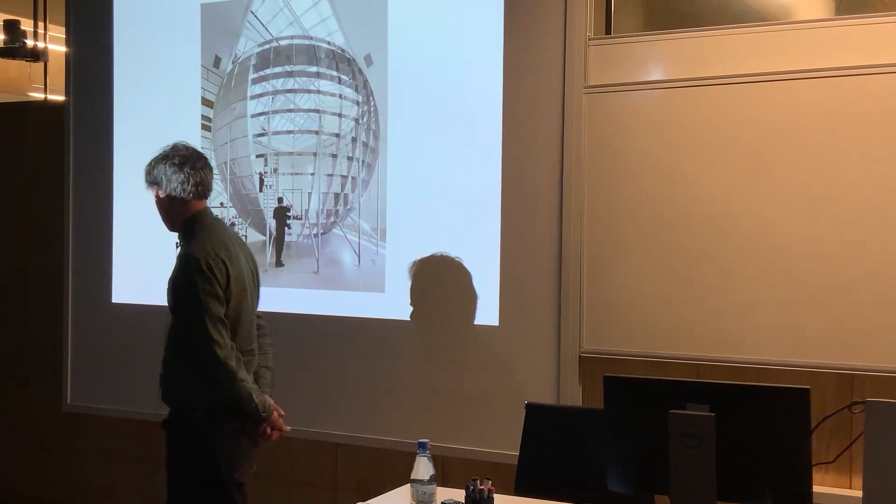Well, when you see how people appropriate their own building, it's always a surprise. I mean, this is a discourse we hold. It's always difficult to see the plastic flowers growing, but there's nothing we can say.

My opinion is that there's a part of architecture that you should protect that belongs to the author. You still believe in the author, and there's a part that does not belong to the author. The border between the two is not clear. It depends on every approach.

I'm not sure how to answer, but it's always a shock to see how. But also, it depends who you call the users. Who are the users you're talking about? If they are really people who sit down and use the space, or they are the clients who actually take control of the project. Yeah, these are different ways of appropriation. The thing is that architecture, everybody wants to do it.

If you want to specify your question, I can answer it more. But I meant if you have ever seen some sort of situation, like you said, I saw the drag queens on this pavilion, and I imagine this place as somewhere completely new and different than if it was for a radio station or whatever. So has that ever happened to you as the building gets old?